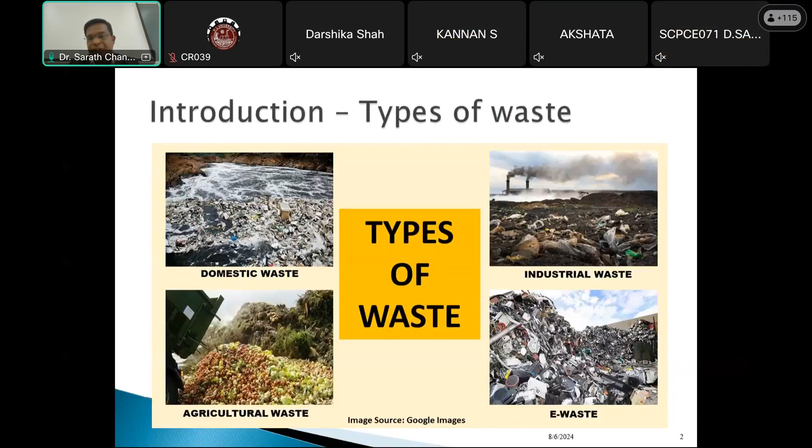So here, if you look at the classification, today I'll focus more on the industrial waste and application of it. If you look at the classification of industrial waste, generally we call it as ISWS. According to their nature, it is classified into two types: organic industrial solid waste and inorganic industrial solid waste. According to pollution characteristics, hazardous waste and non-hazardous waste.

According to the industrial sectors: mining industry solid waste, metallurgical industry solid waste, chemical industry solid waste, food preservation industry solid waste, construction industry materials solid waste. So till now, I was working on mining industry solid waste, and now I started working on construction industry waste, which we simply call construction demolition waste, CDW waste.

So there is also a wide scope. If anyone is interested, we can work extensively on this construction demolition waste because a lot of construction is happening, a lot of demolitions are also happening. So how to use that waste, that I started working on recently. But in this session, I'll limit my research focus to the mining industrial solid waste.

And another kind of waste is according to industry's process, that is fired and unfired. That is again another type of waste. So the industrial waste is basically classified into four types: according to the nature, according to the pollution characteristics, according to industry sectors, and according to the industry's process.

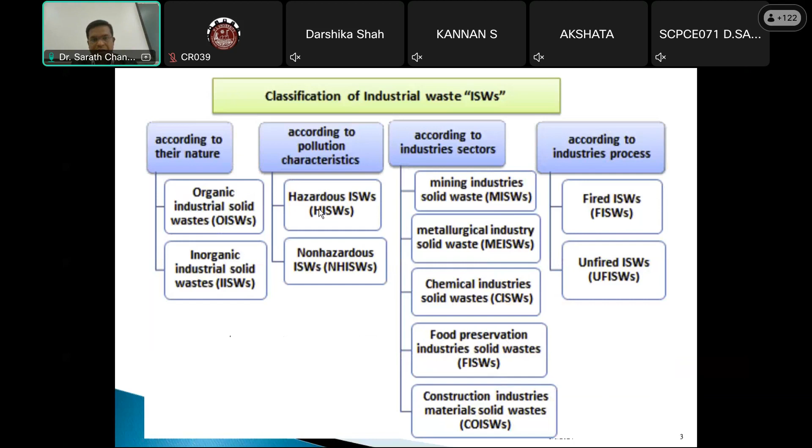So here, basically, I'll be discussing more on the material called red mud. So red mud is an industrial waste.

Just a second. Just a second.

Yeah, so I'll be discussing more on red mud, which is an industrial waste. This red mud is produced during the process of extraction of aluminum from bauxite. Maybe a few of you might have already worked on this red mud. So this is a major waste which is produced during the extraction of aluminum from bauxite.

So the slurry insoluble waste produced during the Bayer process is referred to as red mud, or it is also popularly called bauxite residue. It is a mixture of non-alumina compounds originally present in the parent mineral bauxite and of compounds formed or introduced during the Bayer process cycles. So it has a combination of the materials which are present in the parent material, that's bauxite, and the surrounding soil.

And also during the process of extracting the aluminum from the bauxite in the Bayer process, we induce a lot of other chemicals and catalysts. So because of these catalysts also, there is waste generated. So it's a combination of both parent material and the process material. The Bayer process utilizes bauxite as a raw material to extract aluminum out of it.

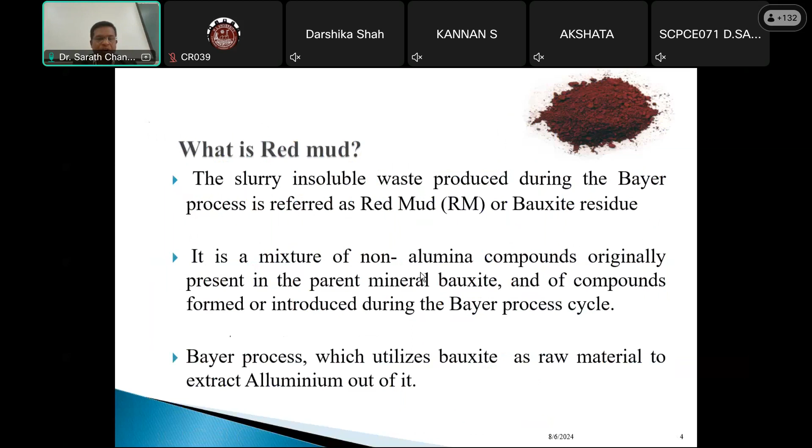So here the Bayer process is explained, an idealized flow sheet of the Bayer process for the treatment of bauxite ores. First they make the bauxite ore into a small powder, then it goes to the process of digestion by infusing lime and NaOH, sodium hydroxide, with steam, then washing and filtration. During the filtration process, the waste that comes out is called red mud or bauxite waste.

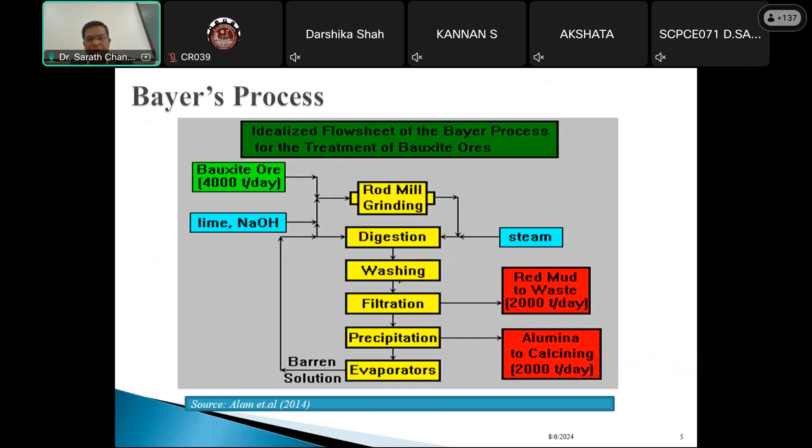So why red mud? There are so many industrial wastes. Today I'll also be discussing iron ore tailings, GGBS, fly ash, all these materials. I'll explain to you what the physical and chemical properties of these wastes are and how they can be applied in the construction of roads. So why red mud?

The disposal of red mud remains an environmental concern all around the alumina producing countries. Not just India, even developed countries are also facing the problem of how to dispose of this industrial waste, because it is hazardous in nature and it has a very fine particle size. These two things make it a big challenge for the industries.

The amount of red mud getting generated continuously is around 1 to 1.5 tons per ton of alumina, and twice that amount for every ton of aluminum metal produced. So as per the research, for the generation of 1 ton of aluminum, 1.5 to 2 tons of red mud waste is generated.

Globally, 70 million tons of red mud is generated. In that, India contributes about 5 million tons. So if you observe, 5 million tons of red mud is generated per year. Very limited efforts have been made in various parts of the world regarding the utilization of red mud as a material for construction.

Limited study has been carried out to find geotechnical properties of red mud, particularly information about the Indian red mud. So even though you can search a lot of articles on red mud, when it comes to Indian red mud and specifically focusing on geotechnical application, it is always limited.

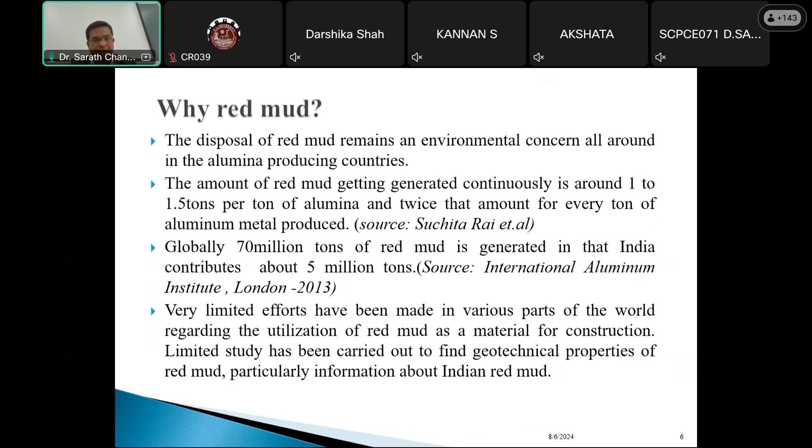So the production and utilization of red mud globally, if you observe here, the figure on my left hand side shows the production in million tons of red mud annually. It is more than 85 million tons in China, around 30 million tons in Australia, Brazil contributes around 10 million tons, and India contributes, as I earlier said, 5 to 6%, I mean, 5 to 6 million tons of red mud annually.

So here, the next figure is a very important figure. This figure shows you what is the production and what is the utilization. First of all, alumina production, which is the blue bar, bauxite residue, which is the red bar, and the green bar indicates the present utilization in million tons per year from different aluminum production units in India.

So if you observe here, Hindalco Utkal, Hindalco Belgavi, Hindalco Muri, Hindalco Renikoot, Vedanta Lanjigarh. These are the different places I collected the data to present what is the aluminum production, what is the waste production, and how much utilization is currently happening in these industries.

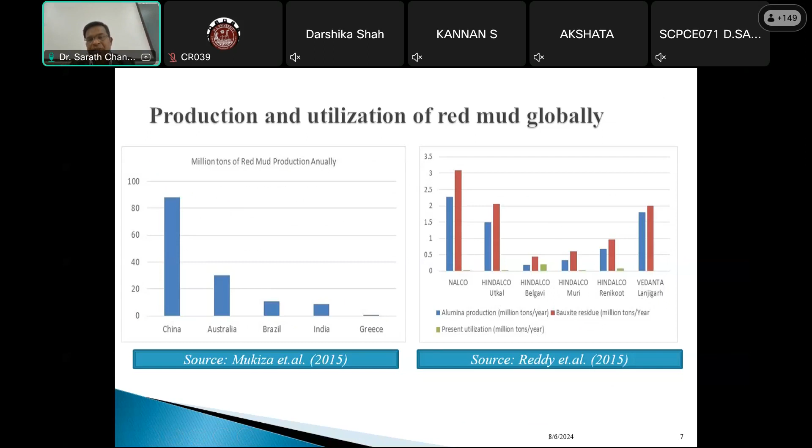So here, if you look at the chemical composition of red mud from different industries around the world. In India, when you look at Malco, it is 45% Fe2O3. Hindalco, it is 35.46% Fe2O3, Balco, 33.80%, and Nalco, 52.39%. Just in India only, we have different types of red mud generated, with different compositions.

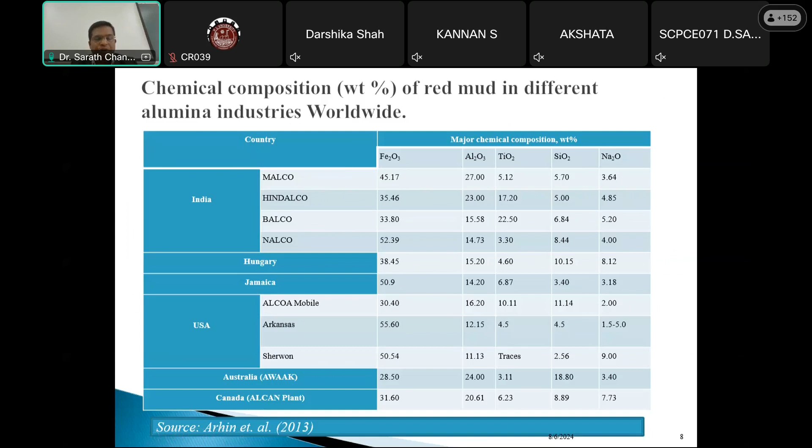So it is very important to understand the detailed chemical composition and chemical properties of the red mud which you collect before using it in any application. Because we cannot say that someone has done research on a particular red mud, so I'll continue with the same red mud properties. Definitely no. Geotechnical engineers can accept my words: soil differs even with just 1 meter, 2 meter difference. Same way, red mud is also different in different units and at different times.

Myself and my colleague did research with the Hindalco Belgavi red mud. The red mud we collected on the top has different properties, and after 3 meters depth, it has different properties, because they dump it as a huge heap. When we dig and collect into bags from different layers, different layers have different properties. That was really surprising for us. And one of my colleagues worked extensively on how different depths of red mud storage have different properties and different effects on utilization.

So when it comes to major problems, I'm simultaneously giving hints where you can work in future, because there are a lot of places where people are still not working effectively. So a lot of scope for you. If you are interested, you can note down my solutions and work on those areas. So the major problem here is disposal of red mud takes huge land.

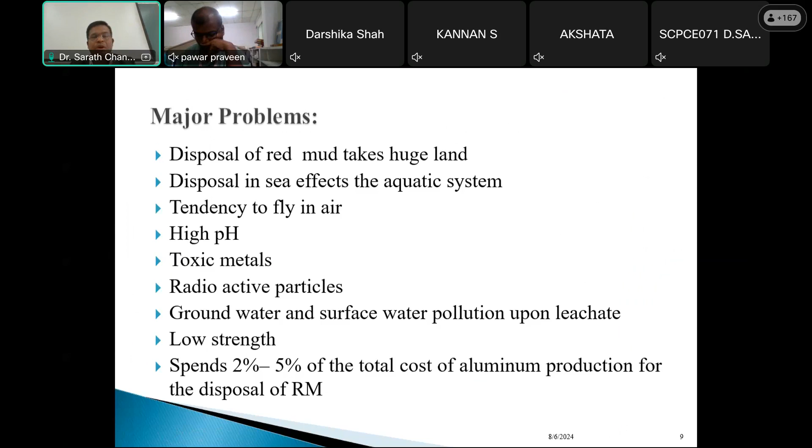But when you want to do extensive research, you need a lot of red mud, and particularly when you want to apply it in geotechnical work, definitely we need a lot of red mud. Present usage of red mud has been made in preparation of building materials such as ceramics, glass ceramic products, fired and non-fired bricks, and in concrete. Even people started using this red mud in concretes, as we all know.

We researchers did extensive work on fly ash, and finally nowadays fly ash is used by many companies in the mixing of concretes or manufacturing of cement. Many places they are using fly ash. So definitely the research we do contributes to the industry if it is really acceptable.

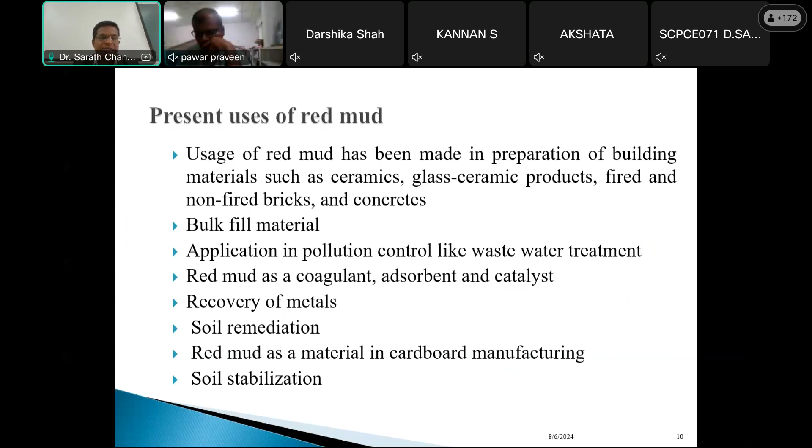That condition is acceptable. Next one is present uses like bulk fill material, application in pollution control like wastewater treatment as a coagulant, as adsorbent and catalyst, recovery of metals, soil remediation, as a material in cardboard manufacturing, and soil stabilization. Here is the literature review.

For the benefit of the audience, I presented here a brief literature review. Though I have done an extensive literature review, I have grouped it into 5 categories: properties of red mud, environmental aspects and problems of red mud utilization, study on stabilization of red mud, current utilization of red mud, and application of red mud in road construction.

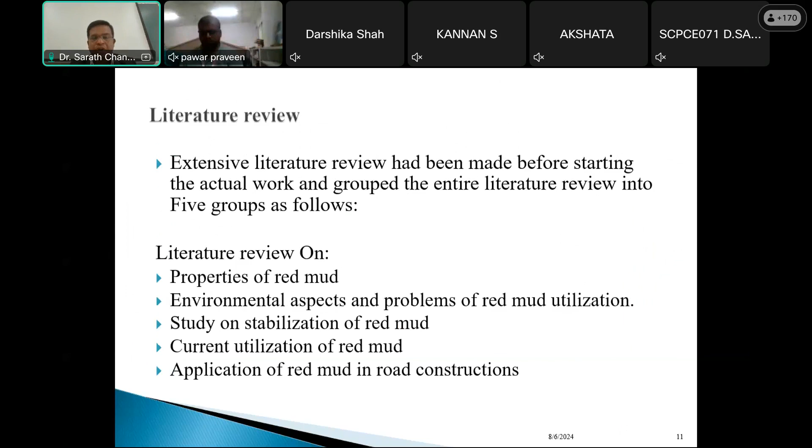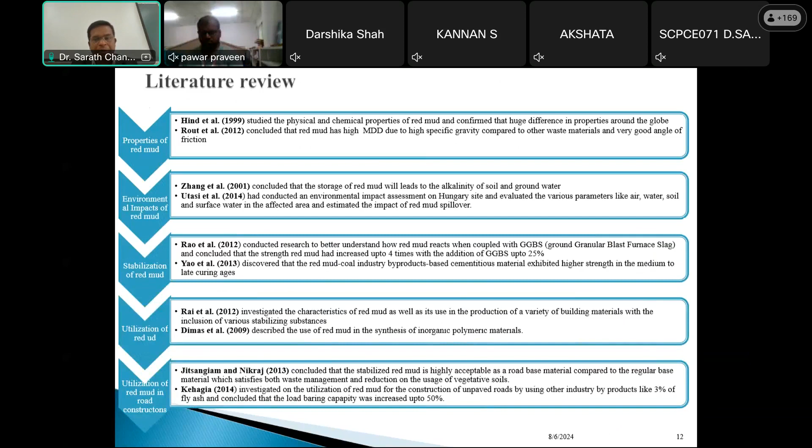Next, identification of gap in the previous research work. All the studies highlighted that red mud exhibits good geotechnical properties, which ascertain that it is practicable to use in geotechnical engineering applications. But the high alkaline nature poorly endorses red mud as a recyclable material or renders it not suitable as a natural resource material.

Though many studies say it can be used extensively in geotechnical applications, at the same time, when you look at the industry perspective or the government perspective, the question mark comes: how safe and how sustainable. These two things need more attention. Because we are talking about sustainable constructions, it's not just using some waste material. At the same time, it should be sustainable for a long time.

Definitely there will be a question: when proper virgin resource materials are not sustaining for a long time, then how can a waste material be sustainable? I think this FDP will enlighten you how different waste materials can be sustainable materials if you apply them in a proper mode.

The issues mentioned above ardently emphasize the necessity to develop holistic approaches and sustainable technologies that would encourage large-scale utilization of red mud, which in turn echoes the prevention of growing adversities associated with disposal practices and consumption of valuable natural resources. So here, it is very important to understand the entire concept of red mud application in all the ways, both sustainability and safety, how it is safe and how it is workable. If you study all those things, definitely large-scale utilization is possible.

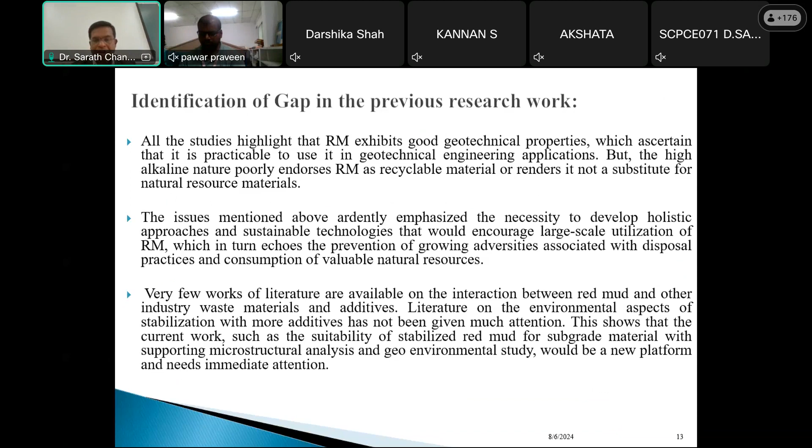The objectives are to study the index and engineering properties of raw red mud, like particle size distribution, specific gravity, liquid limit, plastic limit, OMC, and microstructure analysis; to study the strength properties and microstructure analysis of all the waste materials used in the study; to estimate the suitability of red mud as a subgrade material with other industry waste materials; and to investigate hazardous limits of the leachate. This last objective is very important, because when we speak about utilization of industry waste, the first question is: how safe is it?

So for that reason we did a leachate study, collecting leachate and doing chemical analysis. Leachate is the water that percolates into the soil or through the waste material and finally collects at the bottom. We collected this leachate from the red mud and the best combination of red mud with other industry waste material, conducted chemical analysis, and compared it with the safety limits of WHO and TCLP hazardous standards.

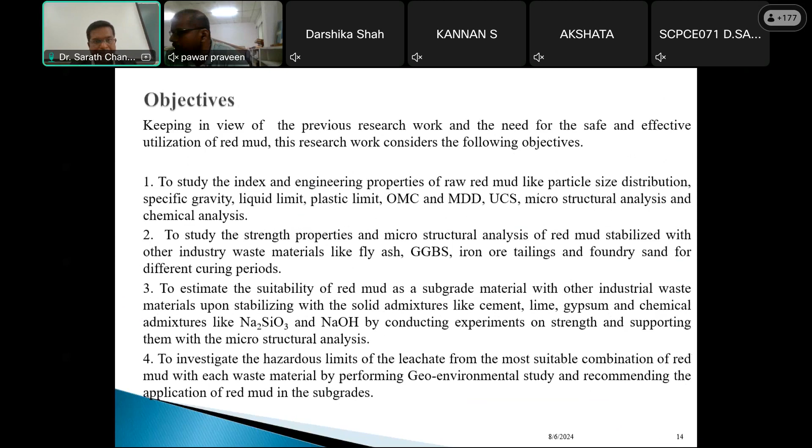So the first material is red mud. Solid red mud was collected from the Hindalco Aluminum Industry, Belgaum, Karnataka, India. The collected red mud was allowed to air dry before testing.

Red mud mostly contains silt, about 75%, which passes through a 75 micron sieve, with the remaining fractions being clay and sand at 15% and 10% respectively. The silt is predominantly more in red mud and is classified as silt of low plasticity as per the Unified Soil Classification System, considered as ML. The specific gravity of red mud is measured as 2.85.

The compaction characteristics of red mud were determined by performing a modified Proctor compaction test, and the optimum moisture content (OMC) is 31.39% and the MDD is 1.57 grams per cc. So this is the brief story of red mud.

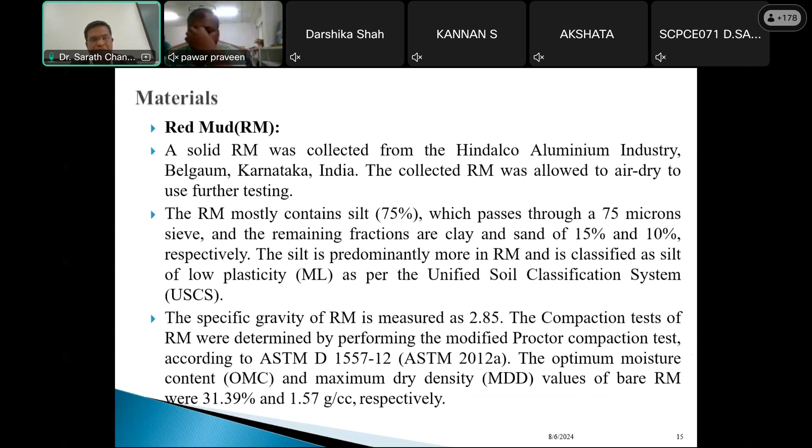The other industry materials used in this research are fly ash, obtained from Raichur Thermal Power Plant at Shaktinagar, Raichur District, Karnataka. It is a coal-fired electric power station operated by the Karnataka Power Corporation Limited and generates 1.5 million tons of fly ash annually, which I took from the literature.

Another industry waste material is ground granulated blast furnace slag (GGBS), which is extensively used nowadays in making various types of high-performance concrete. I used GGBS procured from the JSW cement factory, Toranagallu, Karnataka. GGBS is produced as a byproduct or waste from blast furnaces during the process of making iron.

I intentionally mentioned where I collected each material, because this may help PhD scholars or faculty interested in working on these materials know where to collect them. It may not be the exact same location, but at least they can understand which unit or factory supplies these materials. When I started working, frankly, I wasn't aware exactly where to get materials like fly ash, because many research articles mention fly ash or similar materials but very few highlight where they collected them from. Sometimes the material is easily available even next to my door, but I don't know that it can be used. That's why I've mentioned very clearly where I collected each material.

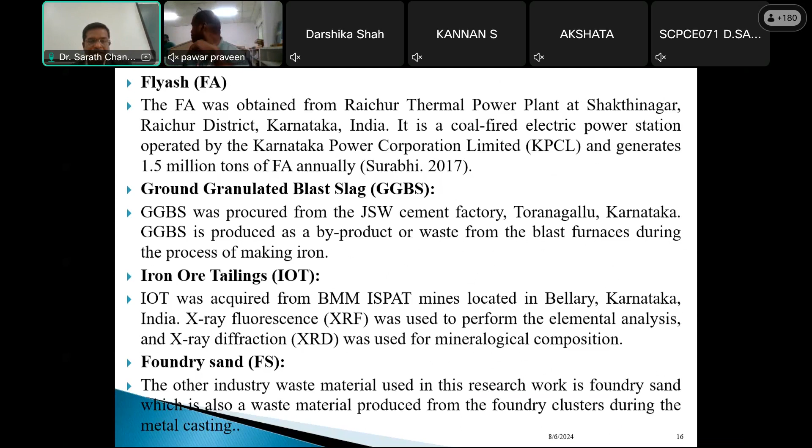Iron ore tailings were acquired from BMM ISPAT mines located in Ballari, Karnataka, India. XRF was used to perform the elemental analysis, and X-ray diffraction was used for mineralogical composition. We did extensive XRF and XRD analysis for all the materials. Next, foundry sand, another industry waste material used in this research, is also produced from the foundry cluster, and this was collected from Bangalore itself, from the foundry.

Here you can observe the SEM image of red mud. Figure A shows the SEM image, figure B shows the XRD of red mud, and figure C shows SEM of fly ash, and figure D shows XRD of fly ash.

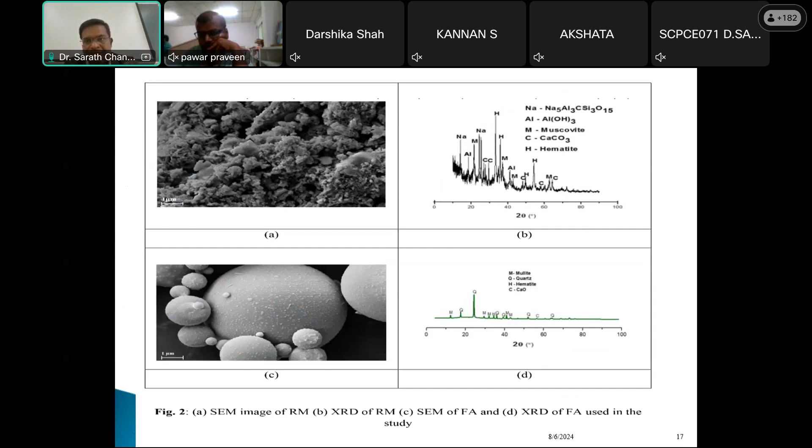If you observe, the SEM images of red mud and fly ash are completely different. Red mud has a needle-like particle shape, while fly ash has a spherical shape. The needle shape and spherical shape combination is best to increase strength, as the research says, and we tried the same by mixing these two materials.

SEM and XRD of GGBS, iron ore tailings, and foundry sand are also mentioned here. You can clearly observe GGBS SEM/XRD, iron ore tailings SEM/XRD, and foundry sand SEM/XRD.

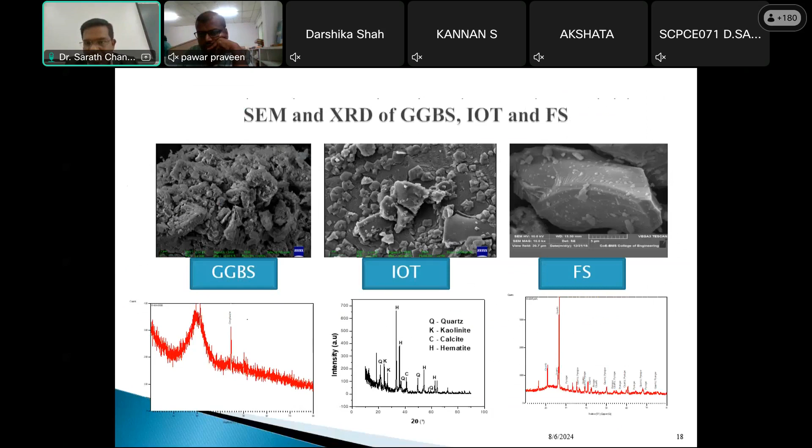Next, the chemical composition of various industry waste materials was determined by performing XRF analysis. To understand the chemical composition of any industry waste material, you have to perform XRF analysis. We performed XRF on all 5 industry waste materials used in this study: foundry sand, GGBS, red mud, iron ore tailings, and fly ash. Here you can observe the concentration of silica, alumina, ferric oxide, calcium oxide, magnesium oxide, sodium oxide, and titanium dioxide.

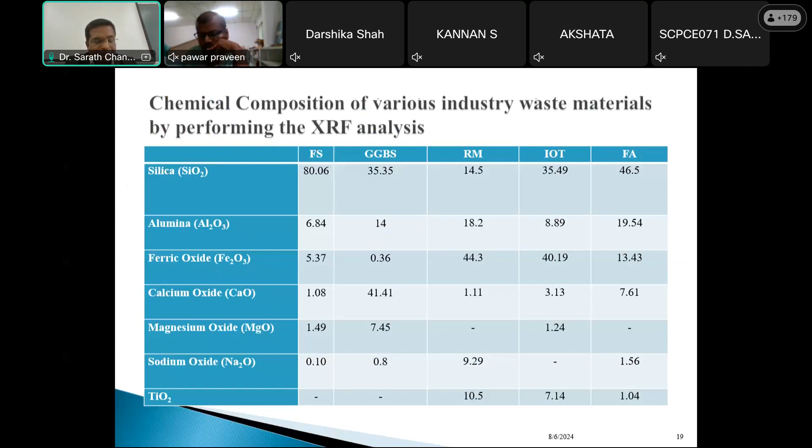Along with these industry waste materials, as I mentioned, just using industry waste materials may not help. We need to add some admixtures. So I have chosen gypsum, lime, cement, NaOH, and Na2SiO3 as the admixtures used.

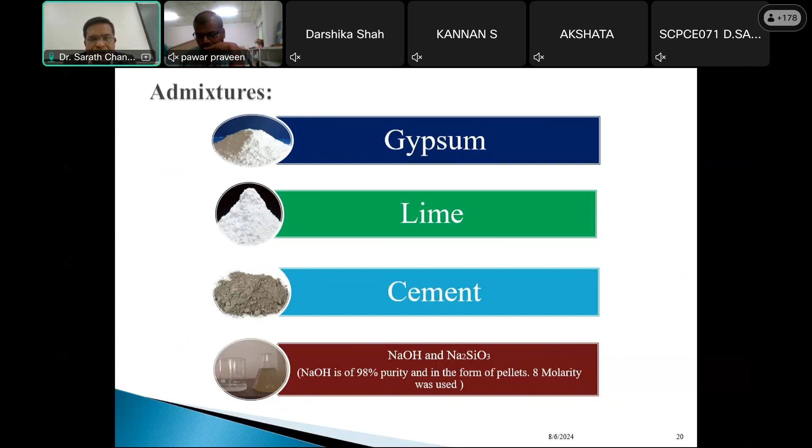Today, in this session, I'll focus more on the application of geopolymer, NaOH and Na2SiO3, and show you how the chemical properties and other aspects change.

The methodology is: material collection, finding geotechnical properties, finding chemical properties, determining microstructural analysis through SEM and XRD. Next, different combinations were used: red mud plus fly ash at 90% red mud 10% fly ash,

80% red mud 20% fly ash, 70% red mud 30% fly ash, and the same set was used for GGBS with red mud, foundry sand with red mud, and iron ore tailings with red mud.

For these materials, we mix the admixtures cement, lime, gypsum, and sodium hydroxide and sodium silicate at 1%, 3%, and 5%. For example, for the 90% red mud, 10% fly ash combination, with cement at 1%, 3%, 5%, lime at 1%, 3%, 5%, and gypsum at 1%, 3%, 5%.

We did this extensive study, and limited the application of admixtures to up to 5%, because it's a known fact that using more admixtures increases strength, but also increases the cost of the product. So we didn't want more cost, and tried only limited minimum application of these admixtures.

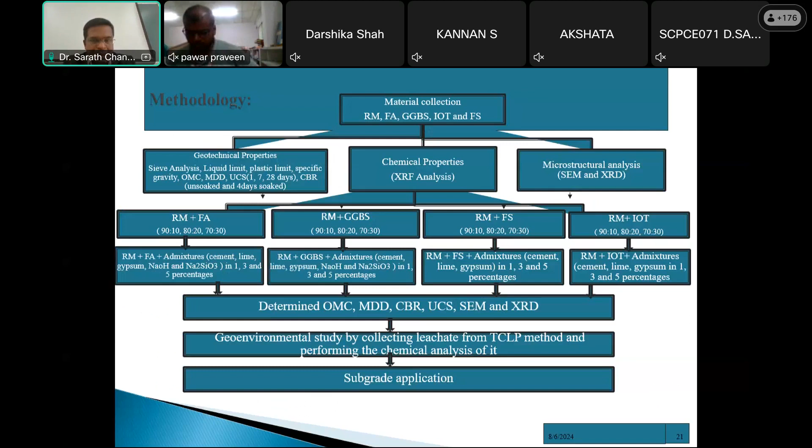When it comes to results and discussion, detailed geotechnical properties of various industry waste materials are presented here. We determined various geotechnical properties to understand the complete behavior of these waste materials. Anyone can take this as a base for their proposed research work.

This is my research work for almost 5 years. I worked extensively on all these materials and came to this conclusion after comparing with a lot of literature.

Here we have specific gravity, pH, liquid limit, plastic limit, and classification of the waste according to soil classifications, and the compaction test. From the compaction test, we determined OMC and MDD, optimum moisture content and maximum dry density. CBR, when we talk about roads, is definitely the most important thing, California Bearing Ratio.

Here the CBR for unsoaked and soaked conditions is given. Though unsoaked isn't that significant, to understand water absorption and water logging capacity we did both unsoaked and soaked tests. Soaked values are important for road construction, particularly in subgrade and subbase materials. We also determined the UCS of all these materials.

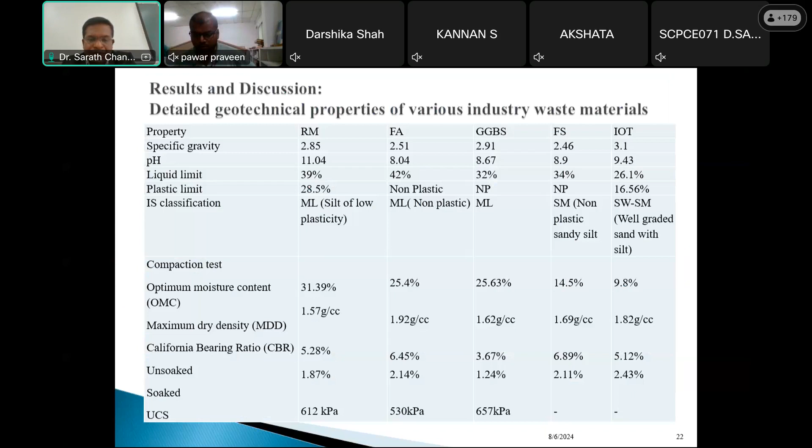The major material in this research is red mud, and the major parameter is CBR and UCS. The CBR of red mud is 1.87%. To use red mud or any other material in subgrade, IRC specifies a minimum CBR of 8%. The unsoaked CBR value of red mud is reasonably fine, but the soaked CBR value, a 4-day soaked value, is only 1.87%, which is not acceptable for road construction.

So the study on red mud with fly ash and admixtures. The first study is red mud with fly ash and admixtures, with the first admixture being gypsum. The best combination among all these is based on the CBR. Let us look only at CBR and UCS.

The best combination among all these trials is a CBR of 10.44% with 95% red mud RF2 plus 5% gypsum. RF2 is 80% red mud plus 20% fly ash.

Let me explain how we came to this combination. First I took 80% red mud, that means 8 kgs of red mud, and mixed it with 2 kgs of fly ash. I made this into one material, called RF2. For this RF2, I took 95% of RF2 and 5% of gypsum.

For example, if I'm taking 1 kg, that means 950 grams of RF2 mix and 50 grams of gypsum. This is how I proceeded with my research.

There may always be a doubt, because when I was guiding my PhD scholars, they would come and ask me, sir, how to mix these materials? What is this combination, what is this number? Whenever I share my articles, there will be a question: sir, what is this RF2? What is this 95% RF2? This leads to confusion, because when I want to present a total one year of work in one paper, I have to use shortcuts. But in detail, that's the way we proceeded, and that's the best method I identified from the research.

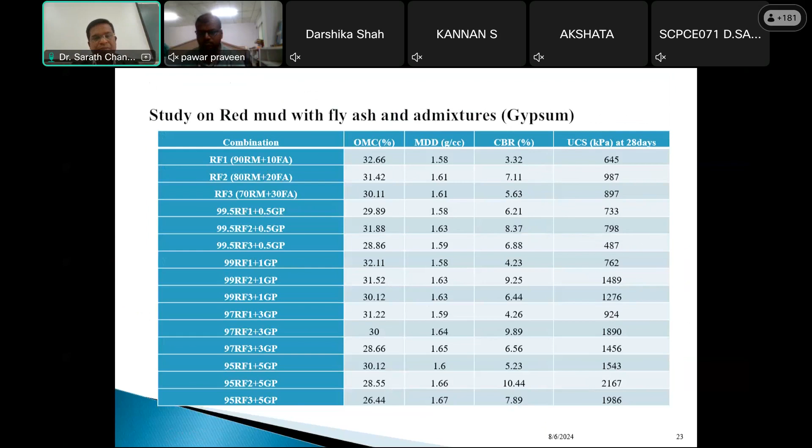Next, strength properties of red mud with fly ash and cement. Another important and popular admixture is cement. With cement, we attained 11.11% CBR and 2,340 kPa of UCS.

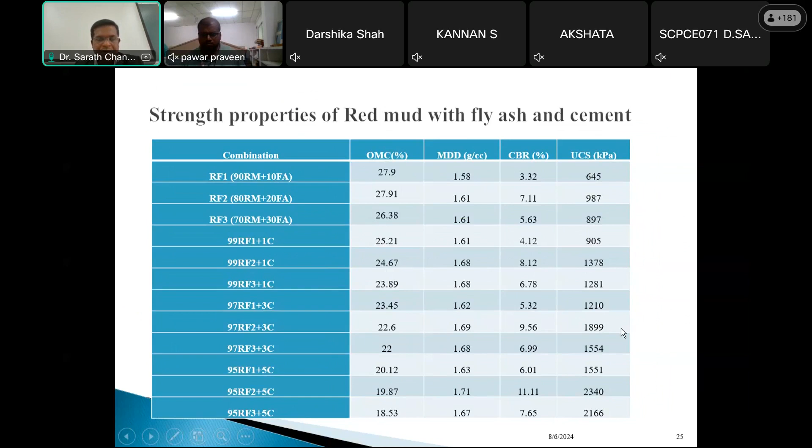And the geotechnical properties of red mud, fly ash, NaOH and Na2SiO3. Generally this combination we call geopolymer. Nowadays a very popular term and area of work is geopolymer. So we tried geopolymer also, and this shows the combination and the maximum.

This is the OMC and MDD, because when using geopolymer, that is NaOH and Na2SiO3, finding the optimum liquid alkaline content and the required MDD is a challenge. That's why I projected this also, because it's not just water - we need to mix these solutions properly, and that has to be presented as OMC for these combinations.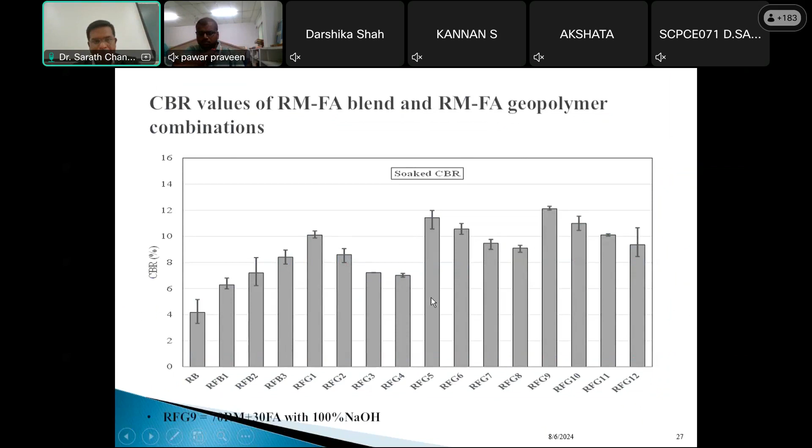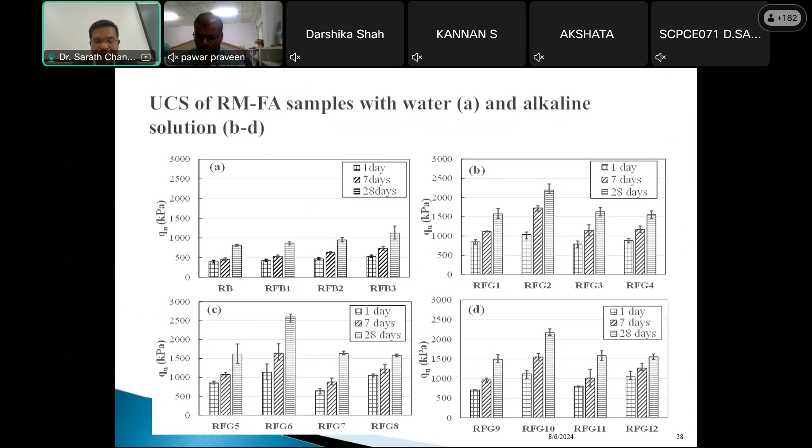And SEM images of RFB2, which is 80% red mud and 20% fly ash with water, and RFG6, which is 90% sodium hydroxide and 10% sodium silicate, and RFG8. These are the three combinations which showed the best results, so we took those three combinations for this study: RFB2, RFG6, RFG8.

The SEM image of 10% replacement of Na2SiO3 shows a needle-like structure, which is not observed in red mud fly ash water blends. You can observe needle-like structures in the SEM image, indicating appreciable reaction of alkaline material, and it also indicates that CAH and CSH formation was observed.

The peak at 35 and 55 degrees on the XRD image of the RFG6 combination shows the presence of alkaline material, hematite, and alumina, which indicates good strength.

So whatever research we do, if you just show CBR, UCS, or any strength value, nowadays nobody accepts it. Definitely, justification is required, and justification only comes by doing the microstructure analysis. And that's the reason we did microstructure analysis on the worst sample and the best sample to understand how the

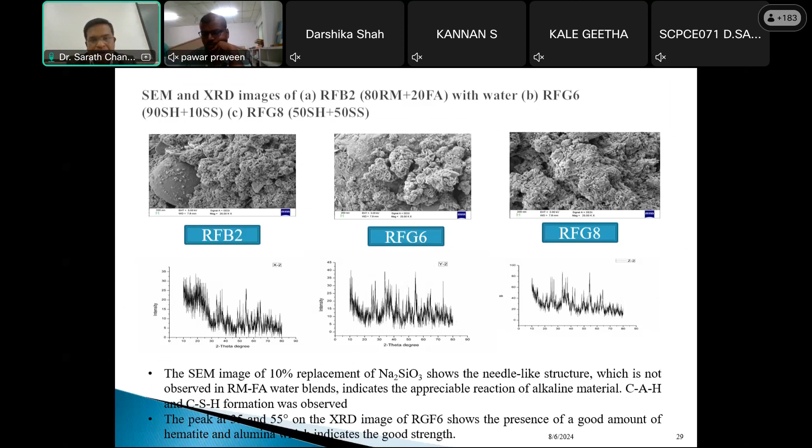reaction works. And here we also did FTIR, Fourier transform infrared test, FTIR. FTIR basically gives the bands. So these bands you need to identify, and the band stretch indicates how much water is present and how the strength is changing from one place to the other.

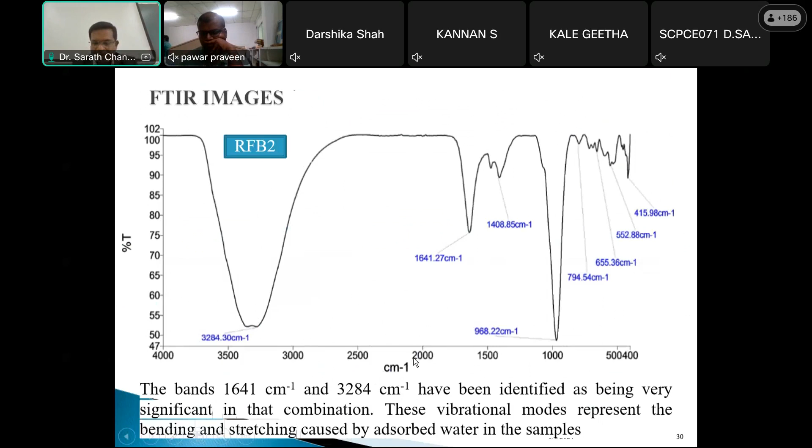And in RFG6, new bands were observed at 1643.20 and another band at 3438.33 per centimeter, which suggests the chemical reaction that results in geopolymerization. So these bands at these two values indicate that geopolymerization has happened.

This conclusion came by looking at various research papers and by discussing with a lot of physics and chemistry people in our school. We discussed a lot with them on how to draw conclusions, because this is completely new. FTIR is completely new, and I think civil engineers very rarely work on FTIR.

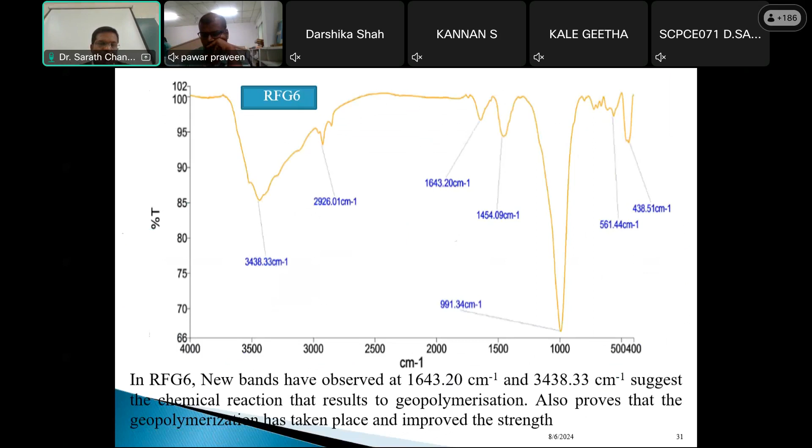Next, study on red mud with GGBS and admixtures. Till now we discussed red mud and fly ash with admixtures; let us now look at red mud, GGBS and admixtures. Start with gypsum. Here CBR is 11.88% for 95% RG2 plus 5% gypsum, and compared to fly ash, UCS increased with GGBS. Even the CBR also increased with GGBS and gypsum compared to fly ash. Okay.

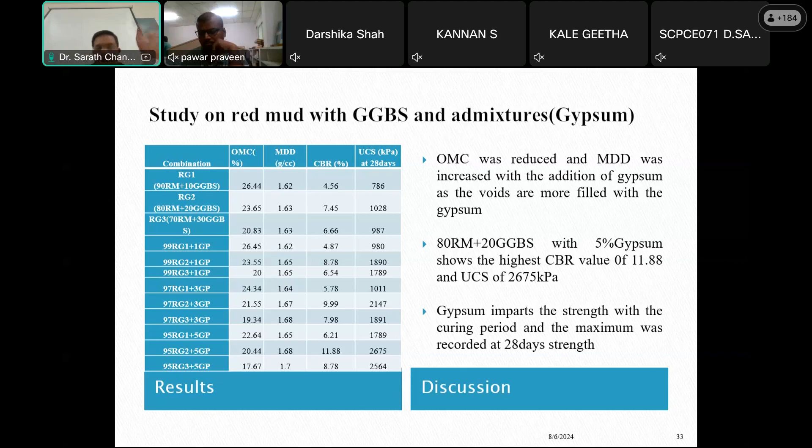Next, strength properties of red mud with GGBS and lime. Another admixture we used here is lime. OMC was reduced and maximum MDD was attained with 95% of 70% red mud and 30% GGBS with 5% lime, and the highest CBR value recorded was 8.78. So among all the admixtures, what we understood is lime has less strength. Of course, we all know cement has the highest strength and lime has less, and even UCS indicates the same trend.

But what I'm going to highlight here is even with lime, we attain 8.78, because anything more than 8% CBR is highly appreciated and highly acceptable for use as a subgrade material in road construction. Many times when I present my research in different forums, there will be a question: generally subgrade material is the existing soil, the soil bed is taken as subgrade. So where can we use this red mud and the research?

See, in some places we don't accept the existing soil directly. You need to remove the soil and bring other soil which has capacity, because sometimes we encounter weak soil on the field. Definitely, you cannot attain the required CBR for that soil. So in such places, they'll remove the soil and add soil which has enough strength. Generally, they'll use borrow soil for such replacing. In such replacing situations, definitely this red mud can be used extensively.

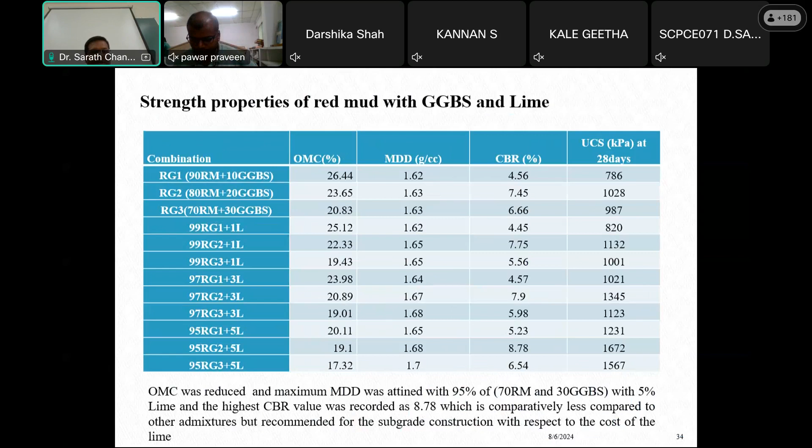And when it comes to road applications, unlike any other application, road application requires huge quantities of material. Cut and fill. We all studied the cut and fill method for the construction of roads, subgrades or subbases. So I focus more on subgrade, where if the CBR is more than 8%, definitely that can be used as a material for subgrades.

And strength properties with GGBS and cement, you can observe here. With cement, the CBR achieved is 12.89%, attained with 5% cement and 95% of red mud and GGBS. So overall, among 1%, 3%, and 5%, in all the combinations 5% shows the best value. But I also want to highlight that even 3% and 1% satisfy the need of 8% CBR and a UCS of more than 2000 kPa.

So if you can get the strength just by using 1% or 3% of cement, for example here, with 1% cement you achieved 8.43 CBR, which is excellent. Okay, so even that will also work. Okay.

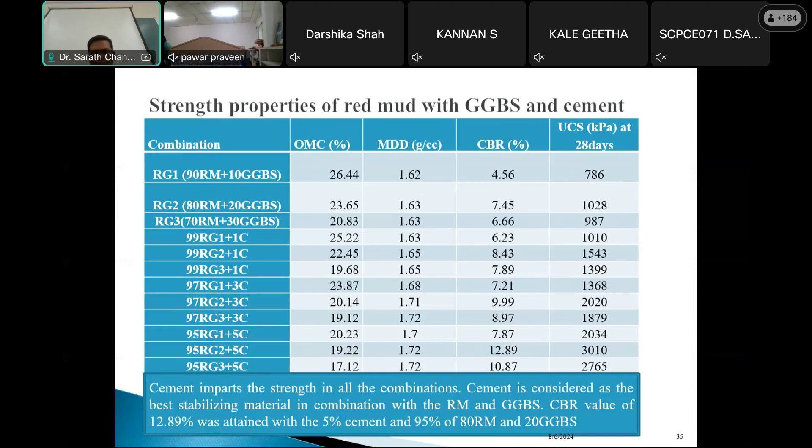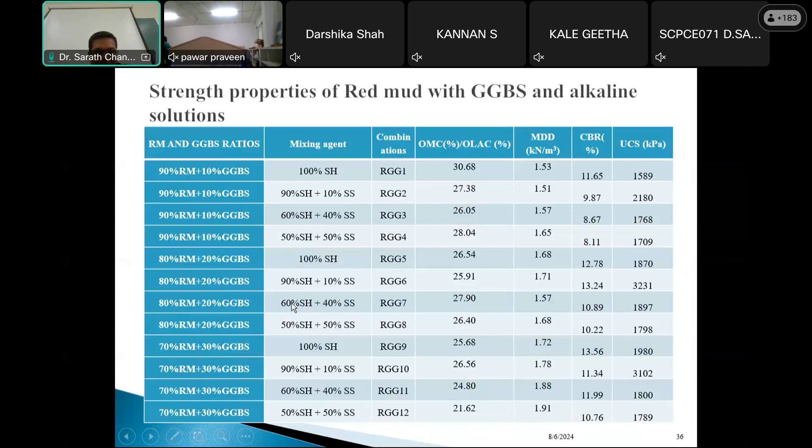And next ones are RGG7 and RGG8. RGG7 is 60% sodium hydroxide, 40% sodium silicate. Next, RGG8 is 50% sodium hydroxide and 50% sodium silicate. So why we did this study is, instead of using just one material, if you apply sodium hydroxide and sodium silicate in different concentrations, how it works. And among all this, 90% sodium hydroxide and 10% sodium silicate has given the best result of both CBR and UCS, that is RGG6.

Nowadays, people started working on completely one material instead of mixing two. People are moving to only using sodium hydroxide or only using sodium silicate, and they are calling it one part alkaline material. If anyone is interested, you can work extensively on this one part alkaline material, that is using just sodium hydroxide or only sodium silicate instead of water. If you use these materials, they are called one part alkaline material. If anyone is interested, focus on that.

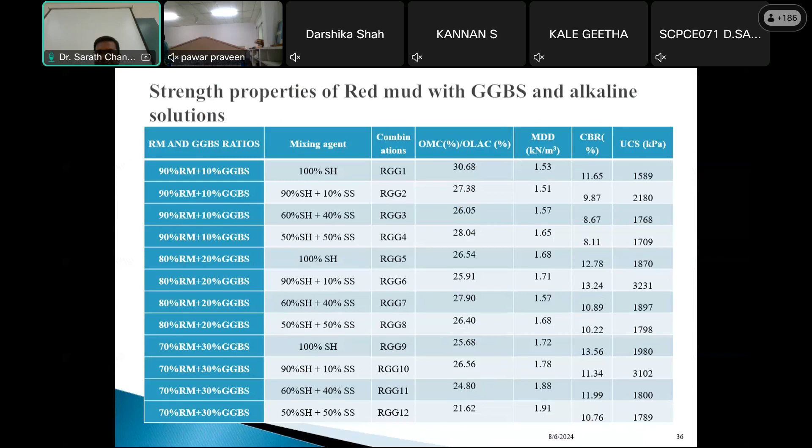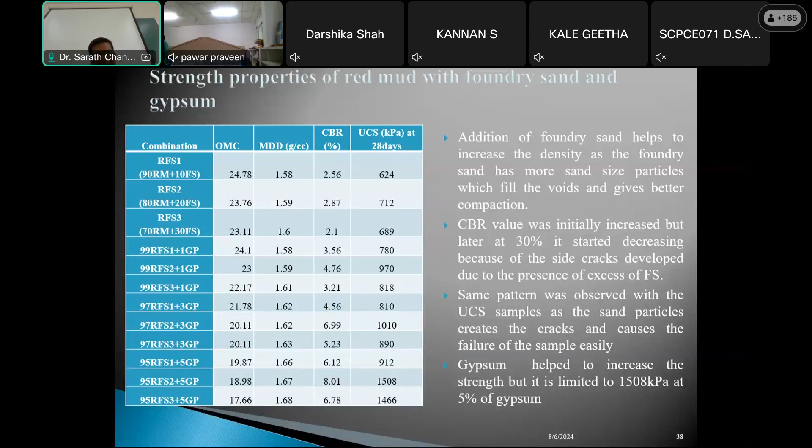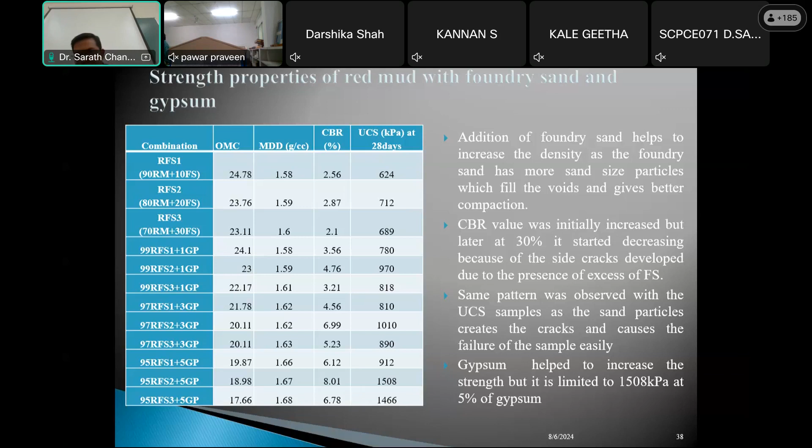And in the strength properties of red mud with foundry sand and lime, the lime imparts strength with the curing period, but the presence of foundry sand will not help much, so this combination is not the best to use in subgrade. The CBR value will not attain the minimum CBR of 8% for use as a subgrade material, but it can be recommended in low volume road construction from an environmental sustainability perspective. So though here we don't achieve the 8% CBR, this combination can be used. For example, in your locality where red mud is highly available, they can construct low volume traffic roads.

What do you mean by low volume traffic roads? You can search the codal provisions or the IRC provisions. What does it mean by low, medium, high? There are different standards. So based on that, you can understand what is meant by low volume, and that is based on the traffic. So in such roads, you can use it even though it is less than 8%, up to some extent.

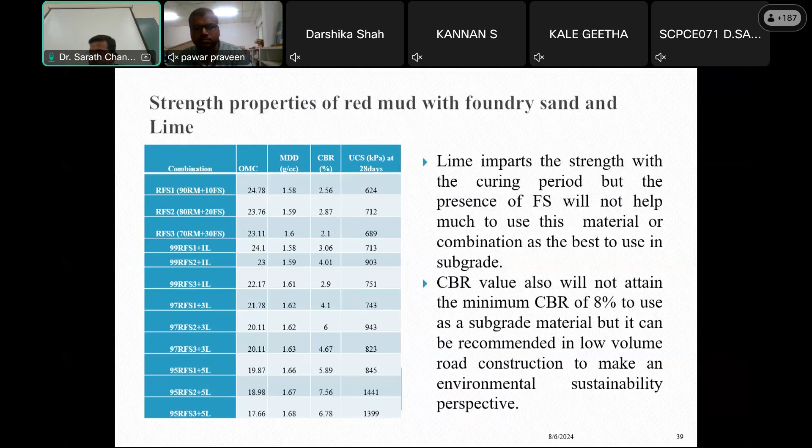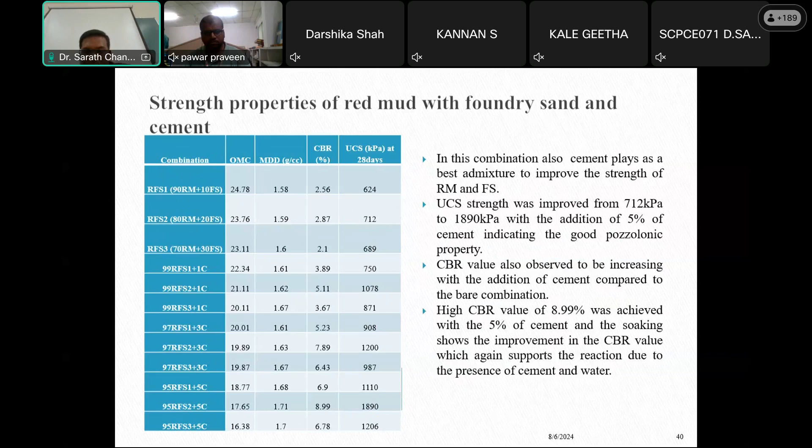Next one is red mud with foundry sand and cement. In this combination, cement acts as the best admixture to improve the strength of red mud and foundry sand. UCS strength was improved from 712 kPa to 1890 kPa with addition of 5% cement, indicating good pozzolanic property. CBR value also increased with the addition of cement compared to the bare combination, and the highest CBR value of 8.99% was achieved with 5% cement, and soaking shows improvement in CBR value, which again supports the reaction due to the presence of cement and water.

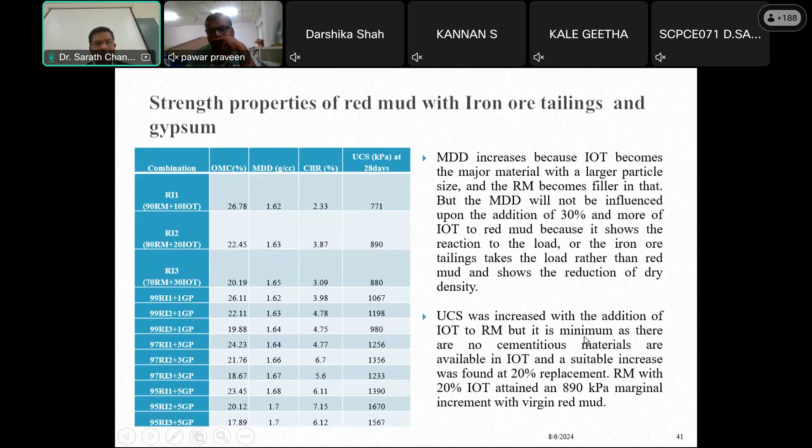Strength properties of red mud with iron ore tailings and gypsum. Here, 20% of iron ore tailing with lime shows a marginal increase, not that great, but still, as I mentioned earlier, it can be used for low volume roads. Though we don't reach 8%, some places even say that 2% of CBR is accepted for very low volume or rural road construction.

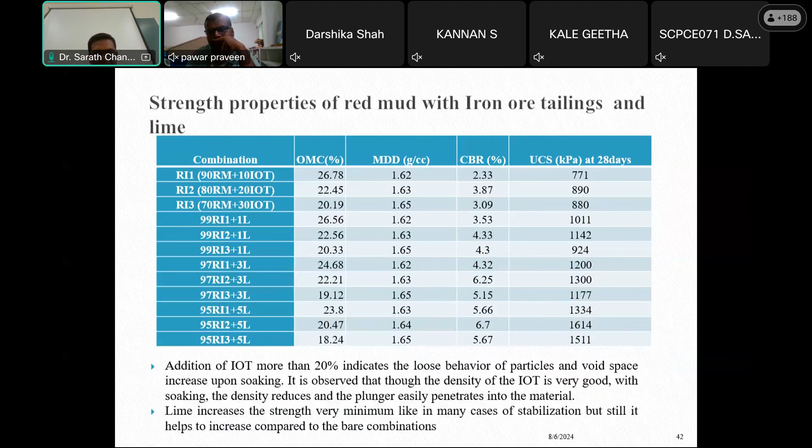Strength properties of red mud with iron ore tailings and cement. Cement hydration produces cementitious material. There is calcium silicate hydrate, CSH, and calcium aluminum hydrate, CAH crystals, which bind particles together and increase the compressive strength. Even 3% of cement addition shows the required CBR and minimum UCS.

So here, even though with red mud and iron ore tailing the density is good initially, when it comes to the CBR, which is a very important property for the construction of roads and road upgrades, it is not matching much. But with the addition of an admixture like cement, it helps to increase the strength, and you can attain a CBR of more than 8%. Even UCS is nearly 2000 kPa at 28 days.

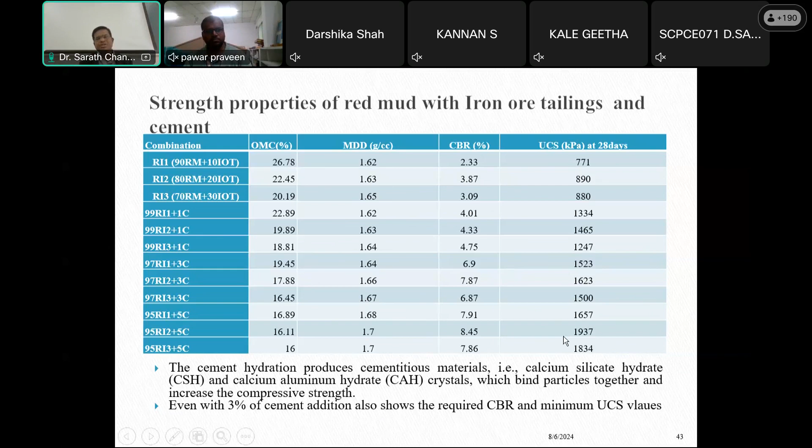Now, the very important parameter, geo-environmental perspectives or geo-environmental concerns of this development with other industrial materials and nature. When you say geo-environmental, it is important to collect the leachate. Here, I followed a method called TCLP, toxicity characteristic leaching procedure. This is a very important and dominant procedure abroad, where they use it to collect the leachate and study its chemical analysis. So I followed the same procedure.

Actually, initially we tried to collect the leachate using a permeability setup, but because of the fine particle size, we couldn't collect the leachate even after a week. We just got 1 or 2 drops. Generally, if it's sand or municipal waste, we just keep it on a permeability setup and collect the leachate, but for a very fine material the regular setup will not work. So we referred to research articles, found TCLP is the easiest method, and followed the TCLP method.

We mix with distilled water and maintain the pH, and it's a different story. If you are interested, you can search my papers for how we perform the TCLP method, because in one of my articles I explained it in detail and also explained alternate methods, because sometimes we may not get exactly the 2 micron filter paper, or they even mention less than 1 micron filter paper. In such cases I explained alternate ways to collect the leachate during the study.

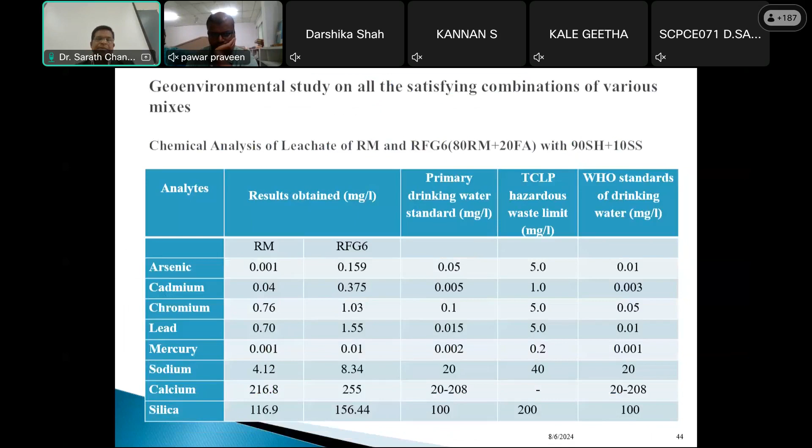So here, if you observe, it satisfies almost all the primary drinking water standards, maybe except one parameter, that is the calcium. The calcium is 216 and 255, while the limit is 20 to 208. Though calcium is more, just 1 or 2 parameters will not match, but the rest all fall pretty well within the standards. So that strongly recommends that yes, this can be used for construction.

And here some comparisons I made with various combinations. Basically, I focused on CBR and UCS. CBR and UCS of 28 days and CBR of 4 days for red mud fly ash combinations are projected here. The blue line indicates red mud, fly ash, and gypsum. The red and brown line indicates red mud fly ash with lime. The green line indicates red mud fly ash and cement.

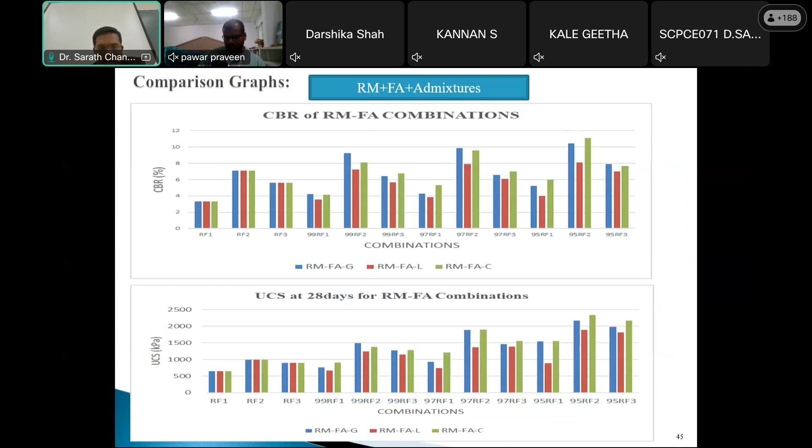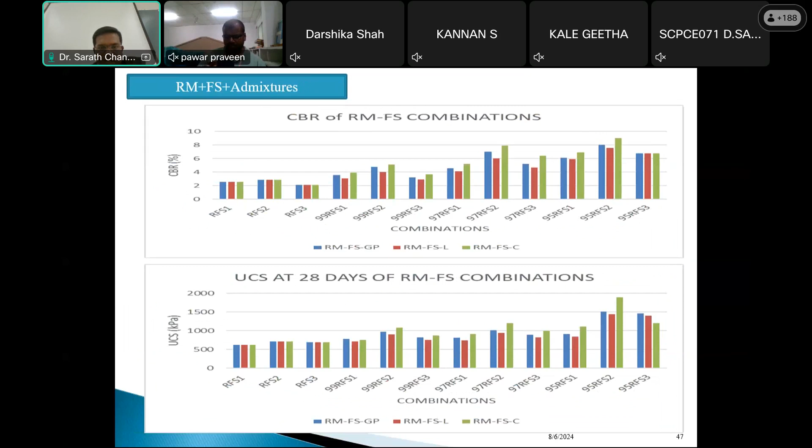So now let's move to the conclusions, based on the characteristics of red mud waste. Specific gravity of red mud shows that red mud is suitable for use as a subgrade material, similar to any material used in the subgrade construction of roads. For natural soil, generally subgrade specific gravity falls between 2.65 to 2.75; though we have 2.8, it is acceptable. The sieve analysis shows 10% sand, 75% silt, and 15% clay size fractions in the red mud sample, concluding that red mud has similar properties to silt, as the major proportion of silt is present.

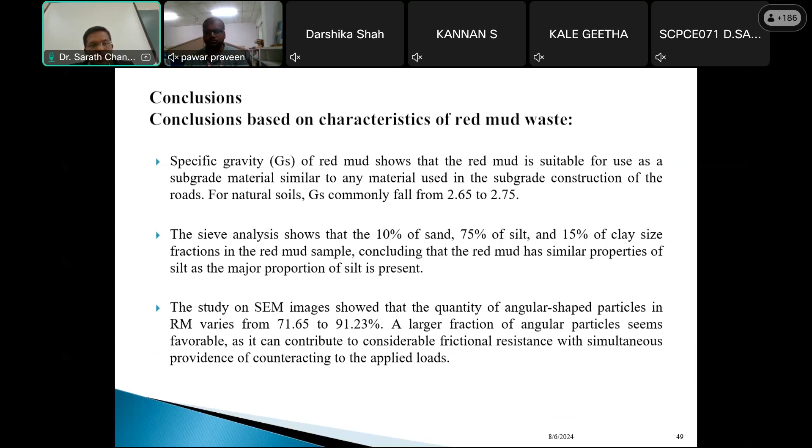The study on SEM images showed that the quantity of angular shaped particles in red mud varies from 71.65 to 91.23%. A larger fraction of angular particles seems favorable as it can contribute considerable frictional resistance. If anyone is interested, you can search papers. There are some papers which focus only on SEM images of red mud and how the angular shaped particles help to increase the strength. Definitely, compared to round shape, angular shape has better resistance and better friction. So that is one add-on property for this material.

The high content of iron and aluminum in red mud was reported to be beneficial for utilizing it as a raw material in cement production. Optimum moisture content was obtained as 31.39% and maximum dry density was 1.57 grams per cc, which also supports using this material as a subgrade material in comparison with the OMC and MDD of any regular subgrade soil. Any regular subgrade soil has a similar type of OMC and MDD.

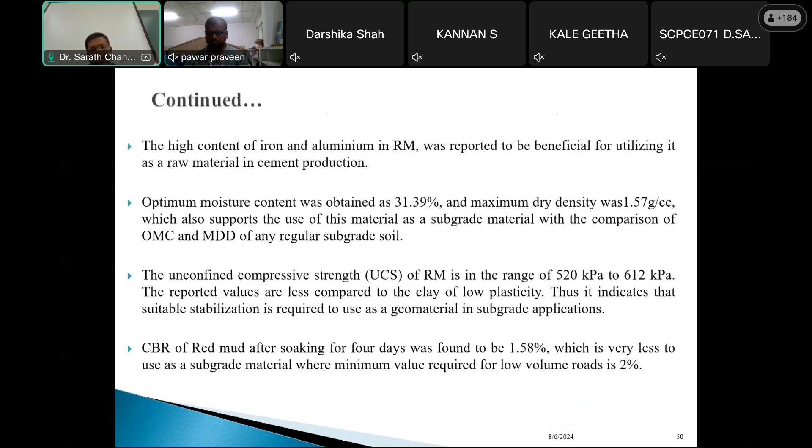The UCS of red mud is in the range of 520 kPa and 612 kPa. The reported values are less compared to clay of low plasticity. So if you look at any clay of low plasticity, the values will be much higher than the red mud. Thus, it indicates that suitable stabilization is required to use it in geotechnical applications. CBR of red mud after soaking for 4 days was found to be 1.58%, which is very less to use as a subgrade material, where the minimum value required for low volume roads is 2%.

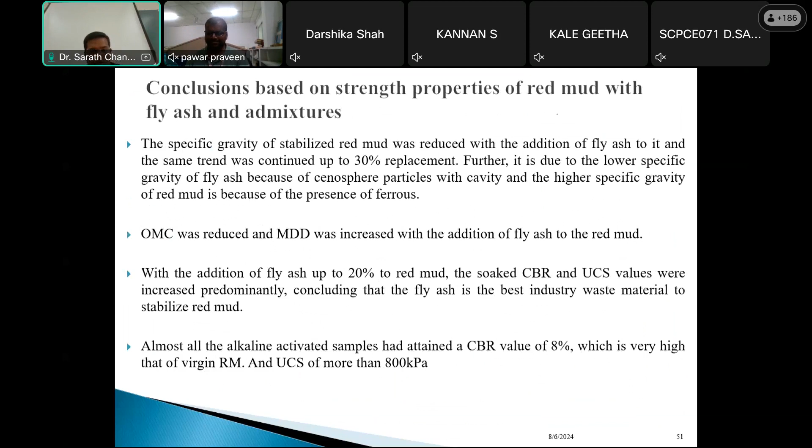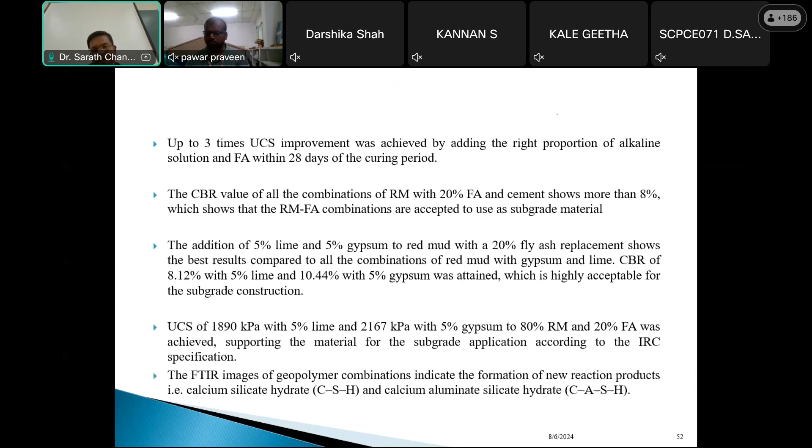So next, the conclusions based on the red mud with fly ash and admixtures. With fly ash and admixtures, it has definitely shown very good strength, both in UCS and CBR, and the microstructure analysis also supports it as the best combination. The FTIR images of geopolymer combinations indicate the formation of new reaction products, that is calcium silicate hydrate and calcium aluminate silicate hydrate. So FTIR also supports the strength improvement.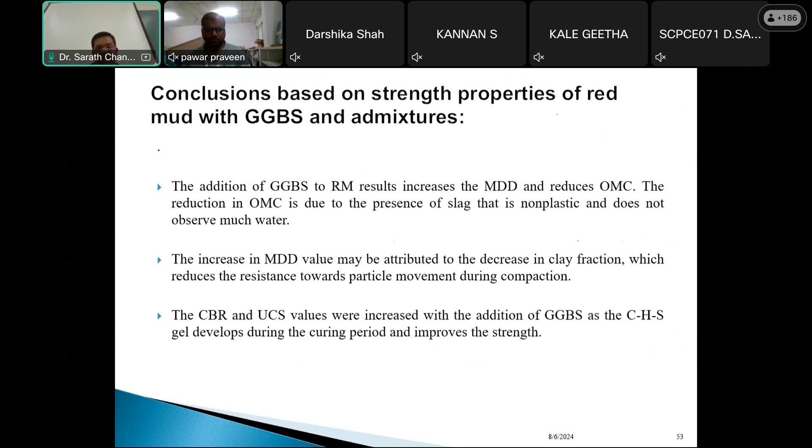Conclusions based on the strength properties of red mud with GGBS and admixtures. Here, GGBS along with the admixtures also helped to increase the strength of red mud, and a CBR of 13.6% and a UCS of 3,267 kPa were obtained with the alkaline activated 20% GGBS stabilized red mud.

Among all the combinations, we achieved the best CBR and UCS with alkaline activators, that is sodium hydroxide and sodium silicate. If you apply red mud directly with sodium hydroxide and sodium silicate, it will not work much. But when you mix it with GGBS or fly ash, it definitely gives better values and better strength. And 13.6% is absolutely fine. When I presented this at an international conference, they appreciated that achieving more than 10% CBR is very good for use in road construction, where industries can accept it.

The SEM and XRD images show the process of alkaline activation in GGBS and red mud. A dense matrix due to alkaline activation of the 20% GGBS mix can be observed, which indicates proper gel formation. And the presence of the amorphous phase leads to the development of pozzolanic activity in GGBS. The XRD pattern of red mud and the alkaline activated red mud GGBS mix cured for 28 days at ambient temperature shows the strength improvement with the peaks of various parameters.

And here, as I told you, I'll give you a lot of scope for your work if anyone is interested. One more very important parameter is increasing the temperature. Here, hybrid alkaline activated red mud with GGBS or red mud with fly ash was cured at a temperature of 110 degrees centigrade. So if anyone is interested, you can work with the increase of temperature. Definitely, geopolymerization works very well with increasing temperature. So we can check the geopolymerization and how the strength improves at various temperatures, like 200, 300, 400, 500, 600, and if your lab supports it, even 1000 degrees centigrade, you can perform the test.

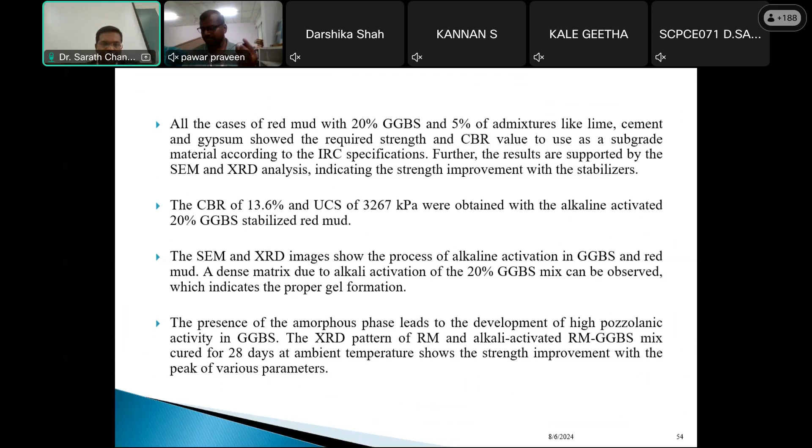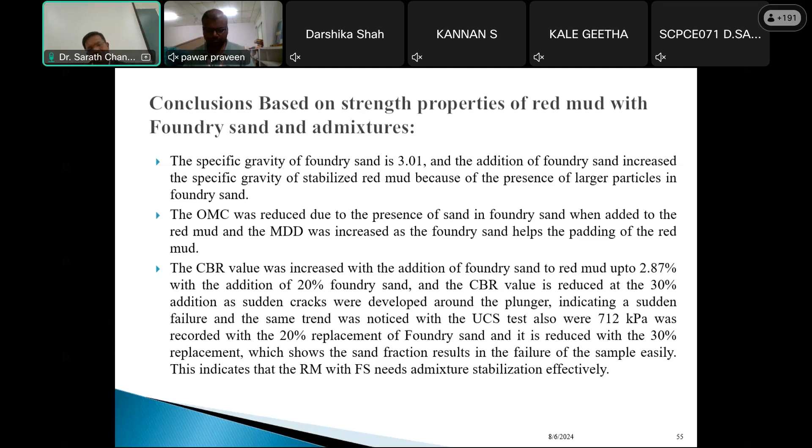The conclusion based on the strength properties of red mud with foundry sand and admixtures. Basically, the CBR value was increased with the addition of foundry sand to red mud, up to 2.87% with the addition of 20% foundry sand. The CBR value is reduced at 30% addition, as sudden cracks were developed. Yes, actually, when we used 30% foundry sand, we observed sudden cracks in both the CBR and UCS tests. It indicates that the crystalline structure of the foundry sand will not help much to increase the strength and will not coordinate with the red mud. And the addition of 5% cement to the 20% foundry sand stabilized red mud showed appreciable values in this waste material combination.

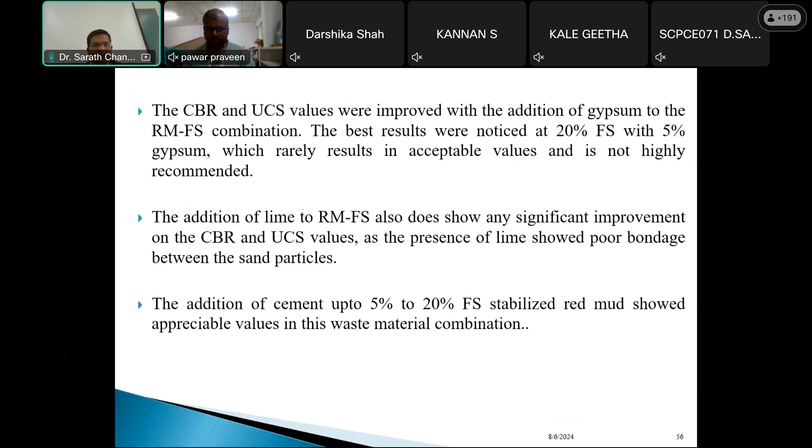Next, with the iron ore tailings and admixtures with the red mud. With 5% cement and 20% IOT, the UCS value attained was 1937 kPa, which is good to use as a subgrade material according to the IRC specification for low to medium traffic roads. Cement and gypsum react well compared to lime with the IOT. The red mud stabilization on soaking in water for 4 days with the surcharge load. The CBR values of red mud IOT with 5% gypsum and 5% cement show CBR of 7.15 and 8.45% respectively.

It indicates almost 4 times the actual red mud CBR value, which again proves the application of red mud with IOT as a subgrade. On the other hand, the density of IOT helps red mud to be stable in the subgrade of road construction, where it is covered with the top layer. So, as I told you, iron ore tailings have a high density.

So in some places we did a study where we used only iron ore tailings and red mud, increasing different parameters from 100 to 0 and 0 to 100. Just directly using iron ore tailings or red mud can work as a road construction material. This is an area a lot of people are not extensively working on, because when we say iron ore tailings, it's a hazardous material and people reject it, but there's a lot of scope for research here.

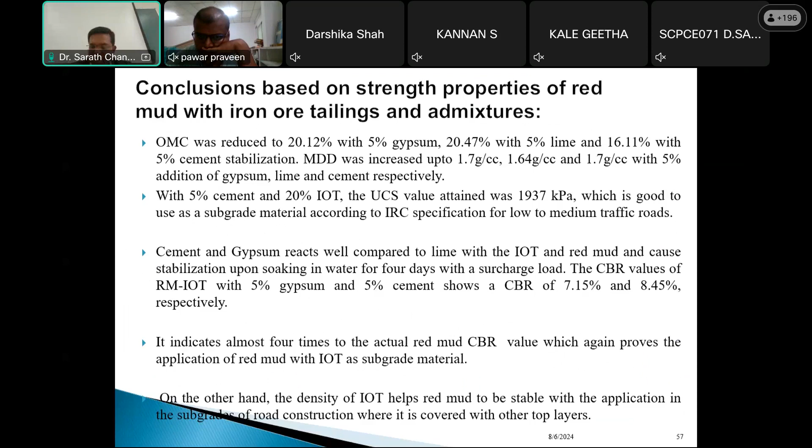Conclusions on the chemical analysis of leachate of various red mud and industrial combinations: the addition of admixtures to all combinations of red mud with fly ash, GGBS, foundry sand, and IOT helps reduce the concentration of heavy metals, because the cementitious products create a solidification which limits hazardous elements when they come in contact with water. So the beauty of these combinations is that when you add cement or cementitious products to the waste, this creates a solidification that won't allow much water to pass through the soil. Even if it does pass through, the concentration of hazardous materials will be limited, restricted by this cementitious process.

Among all these admixtures, cement stabilization reduces the impact of heavy metals in leachate, and IOT shows an increase in the concentration of secondary heavy metals, which needs to be studied further. So though the concentration of primary heavy metals was reduced with IOT, the secondary heavy metals, also called other hazardous materials, increased. This needs to be addressed because sometimes even though one concentration is less, another increases.

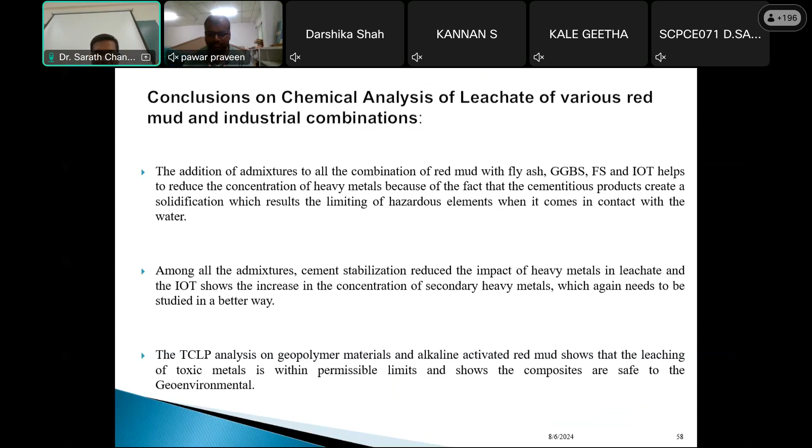As I mentioned earlier, I chose only 8 chemicals or 8 analytes because of various parameters. The TCLP analysis on geopolymer materials and alkaline activated red mud shows that the leaching of toxic metals is within permissible limits and shows the composite is safe to the geoenvironment.

Overall conclusions: red mud with 20% fly ash and GGBS increases the strength up to 2 times and can be used as subgrade material. Cement and chemical admixtures show the best results, improving strength up to 4 times, and are highly recommended for subgrade application. Red mud with 20% foundry sand or IOT improves strength but not efficiently, only satisfying subgrade requirements with additional 5% admixtures. The geo-environmental study satisfies that these red mud formulations are safe materials to use.

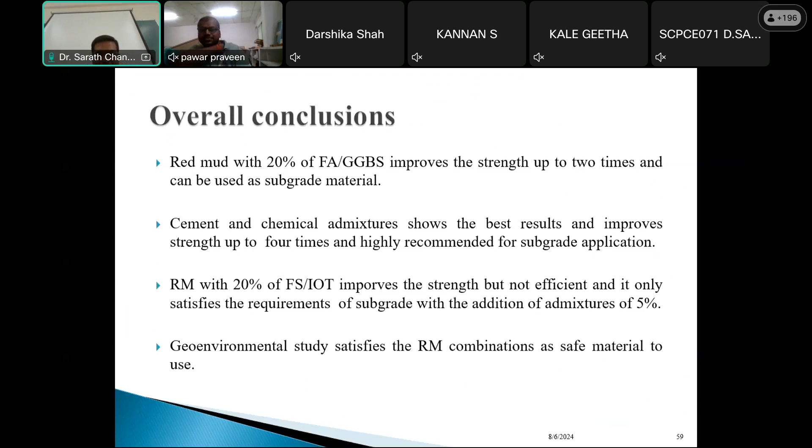For future scope, throughout this process I gave a lot of hints and gaps. Here are a few points I'd like to highlight: to understand the economic benefits of this material, a detailed economic input-output life cycle assessment, called EIO LCA, is required and can be considered as future work.

As I was discussing with Chaitanya sir, he told me to give some inputs on where I found gaps, so that's why I mentioned this scope. Economic benefits, particularly how the idea I proposed—using red mud with other industrial materials—is economical.

It is definitely economical in places where abundant red mud or other waste material is generated. Nowadays, if you propose any material, they'll ask how it is beneficial, what the cost analysis is, what the product cost is, and how it is economically good. First is safety and quality as parameters, and another parameter is cost—how it will reduce cost and how it will help.

If researchers are able to address the cost issue, at least a few companies will come forward and use these materials. If even one company uses this material, our research is a success, because all this research shouldn't go to waste and shouldn't be limited to just a conference or paper. My team and I essentially work where we can practically apply this—we're even trying to construct a road using these waste materials within our campus, because going outside would require a lot of permissions and approvals from government bodies and other agencies.

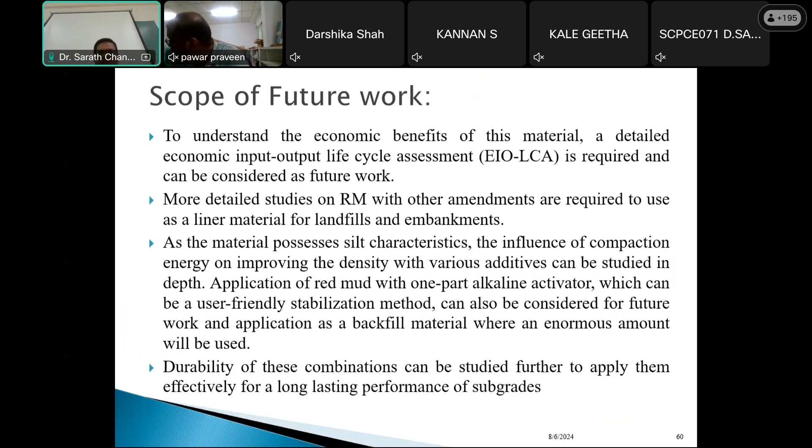Some research ideas just come in a very easy way, and among them this is one idea. When you have ready-made work, you can take my work or any work and just study its durability. Then it becomes very good research, maybe at MTech level, and if you study extensively, you can even propose this work as a PhD.

I can see the questions. Yes, there are some questions.

First question is please explain how the sampling is done for the leaching test and stabilized soil. This is called the TCLP test - Toxicity Characteristic Leaching Procedure test. For this test, you have to take some 30 grams of sample, which is passing through the 425 micron sieve.